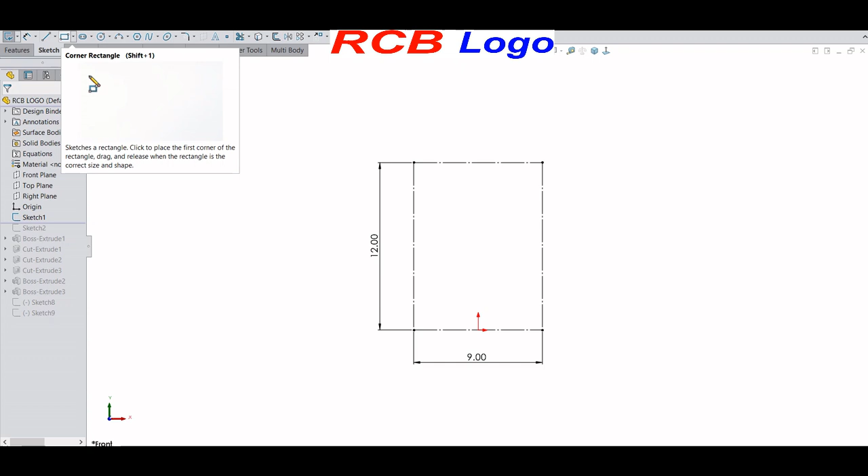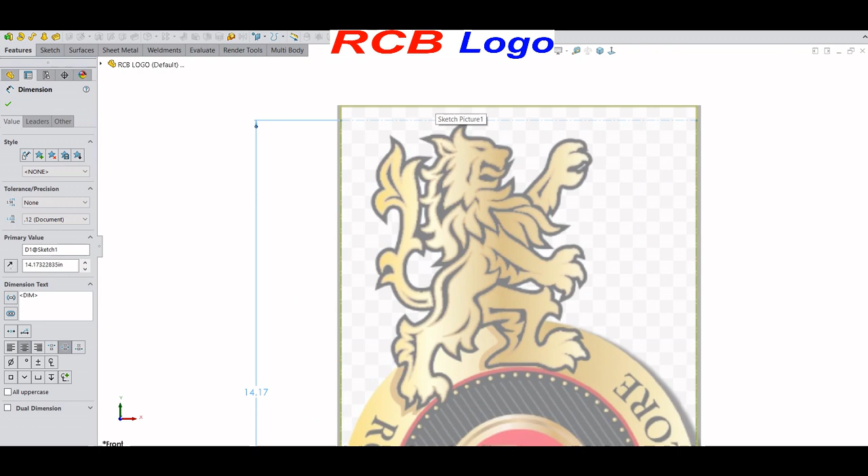Now I am in SolidWorks. On the front plane, I sketched a rectangle of length 9 inch and arbitrary height of 12 inch. Then again on the front plane, using the sketch picture tool, I inserted the logo image and scaled it to match exactly the 9 inch length. The height of the image changed to 14.17 inch, which matches perfectly.

Then on the front plane, I drew an outer circle of diameter 9 inch. Then extruded it backwards to a depth of 0.5 inch for the logo base. Then I drew 3 concentric circles to match the logo, with dimensions shown in mm.

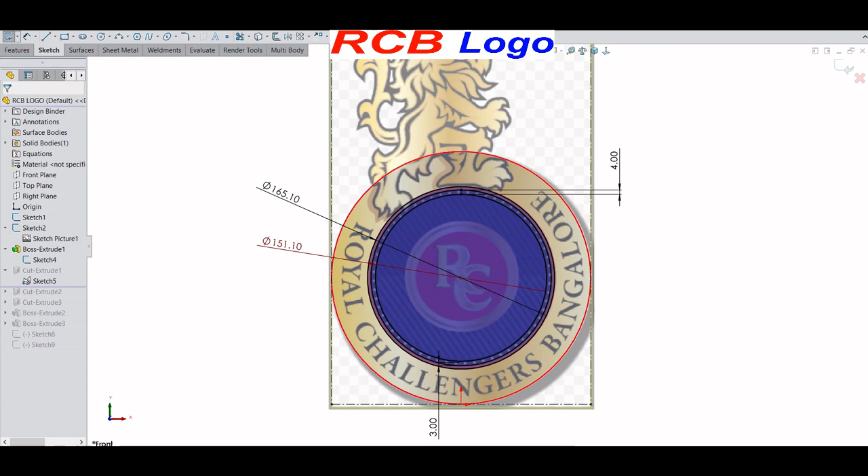I created a cut of depth 2 mm from the outer 2 circles. Then created a cut of depth 4 mm from the inner 2 circles. Then created a cut of depth 6 mm exactly at the center.

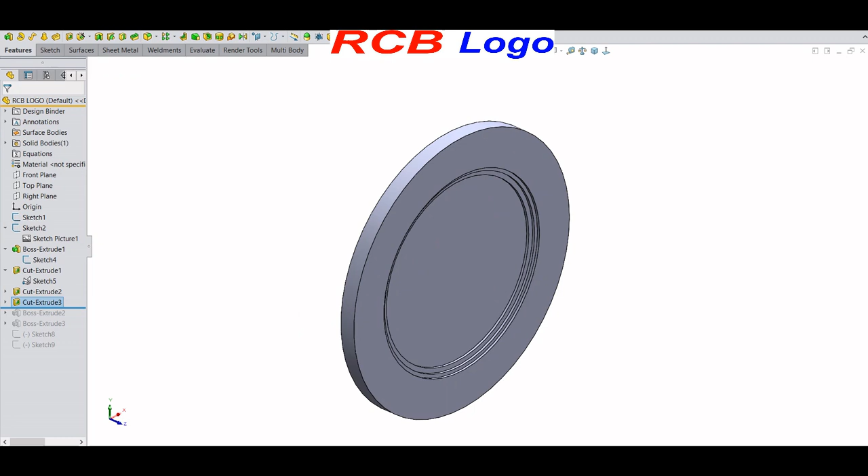Then I drew the innermost 2 concentric circles to match the logo image, then extruded it up to the surface to match the inner face.

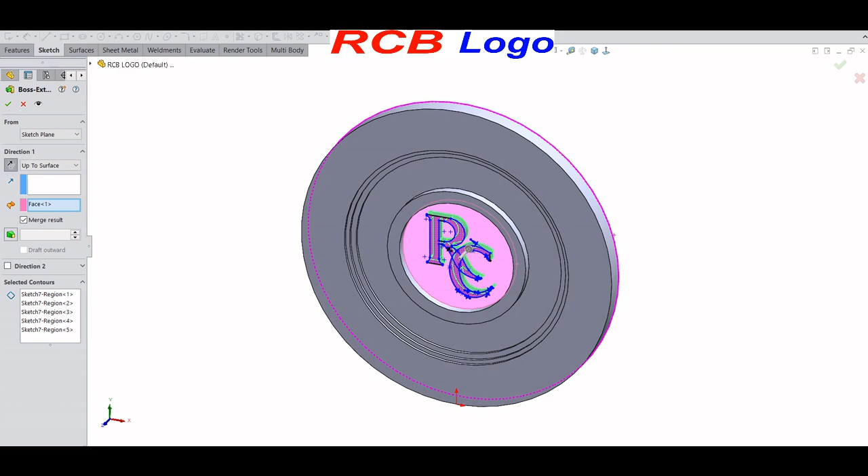Then I sketched exactly on the alphabets R, C at the center, then extruded the alphabets RC together to match the inner face.

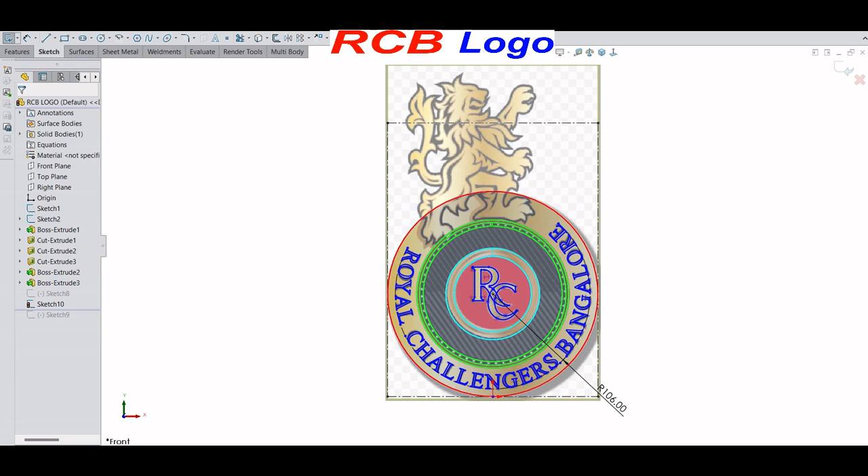Then I drew a center point arc for the Royal Challengers Bangalore curved text path, and split the arc for text gaps. Then added Royal Challengers Bangalore sketch text on the curved arc with Times New Roman font, then embossed it to a height of 1 mm.

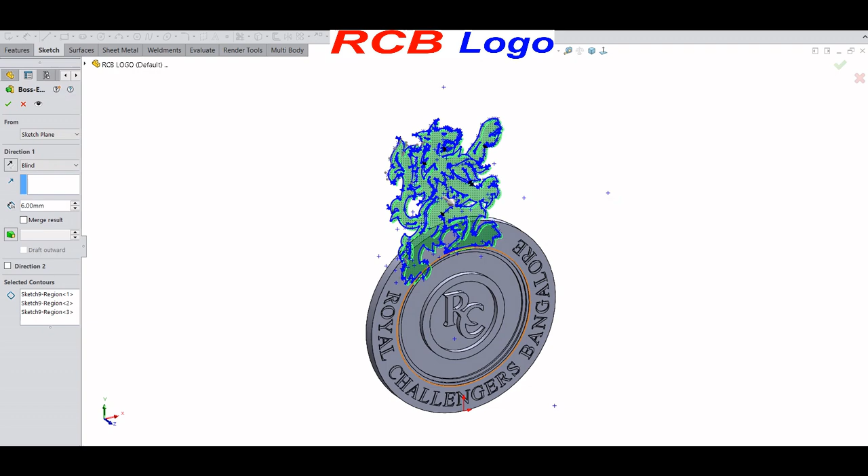Then I traced the lion outlines with a sketch, predominantly splines, then extruded the lion to a thickness of 6 mm as a disjoint body. A completed 3D logo of RCB.

Ultimately, I applied all the appropriate logo colors to the 3D model.